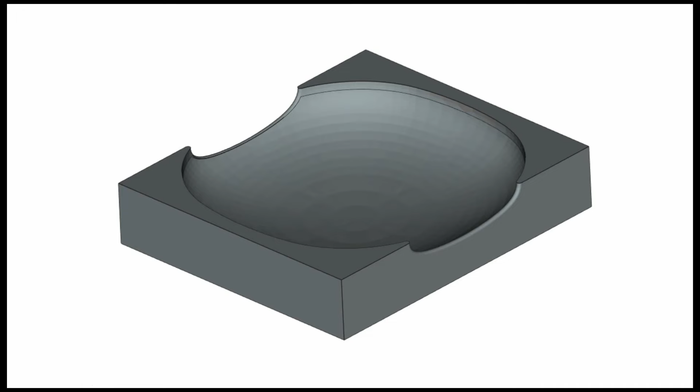So first off, in CAD we need to have designed or modelled a jig, and that is going to secure that wooden substrate. And then we will also need to incorporate in these models our actual design that is going to be printed on the wooden base as well.

Now the most important thing is the height of the jig from the base of the tray to the top of the jig, and that is where we're going to tell the printer to pause, and then we will insert the substrate and then print the design.

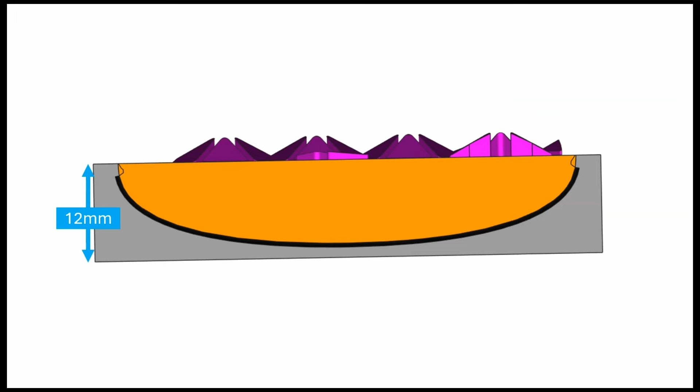Now within GrabCAD we'll open up a new project, and we're going to open up the new Pro feature Print on Object, and we can go through the workflow.

So we've created this assembly that we just spoke about, and then we're going to go off and import that into GrabCAD Print.

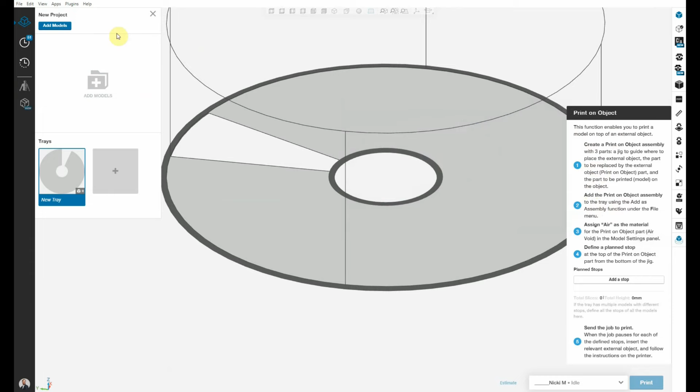So here we have our assembly with 3 bodies, and just for ease of use we can open it in the disassembled view, and we can rename our files.

The object, the jig, and the designed model.

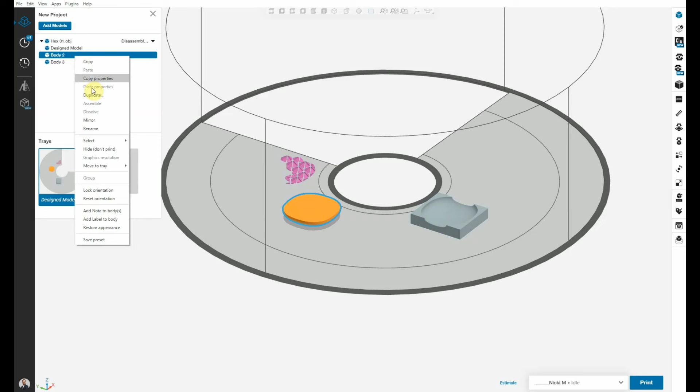We can reassemble that, and let's make those material assignments now.

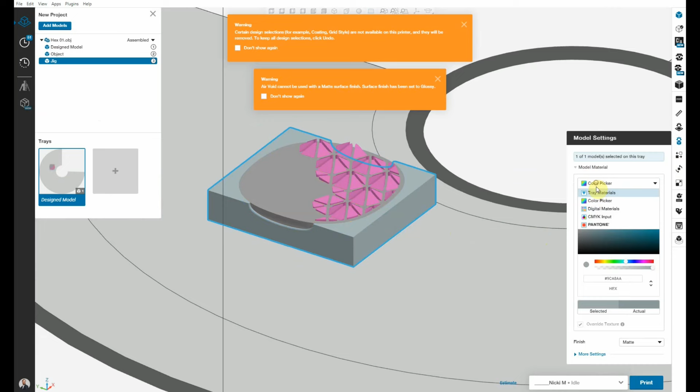So for the substrate we're going to assign air. For our jig we will assign a white material, and then we can make sure that we have a color assigned for our design. We can make sure that we have print directly on tray selected.

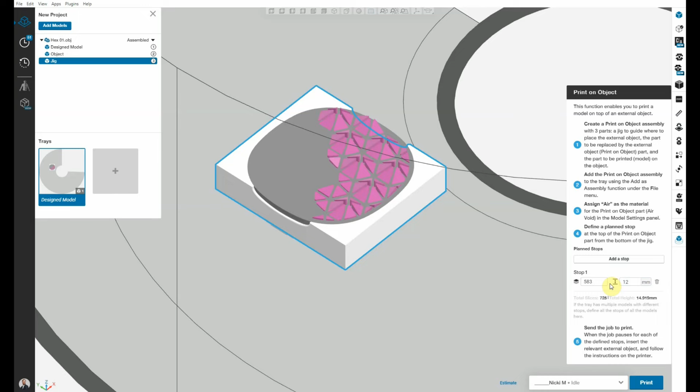And now we can move on back onto the print on object, and we're going to go define a planned stop, and we'll add a stop at 12 millimeters, and we can send the part to print.